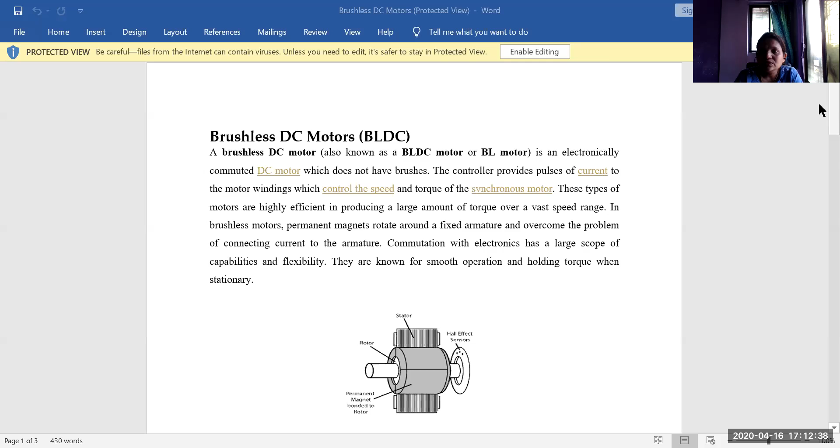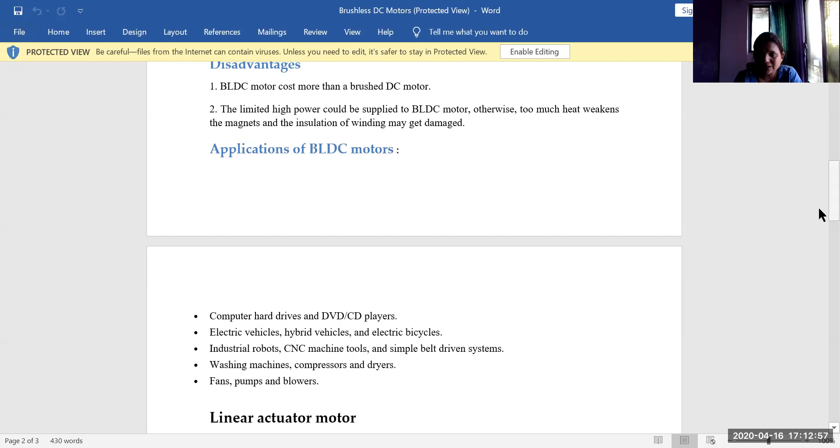So this type of motor is widely used in DVD and CD players as well as washing machines, compressors, dryers, fans, pumps, and blowers. So these are the applications. Now we will see the advantages. Advantages of brushless DC motors are that they can operate at high speed under any condition. There is no sparking and much less noise during operation. As we know, these are brushless; since the brushes are absent, the mechanical energy loss due to friction is less, which enhances efficiency. This type of motor accelerates and decelerates easily. They have low rotor inertia.

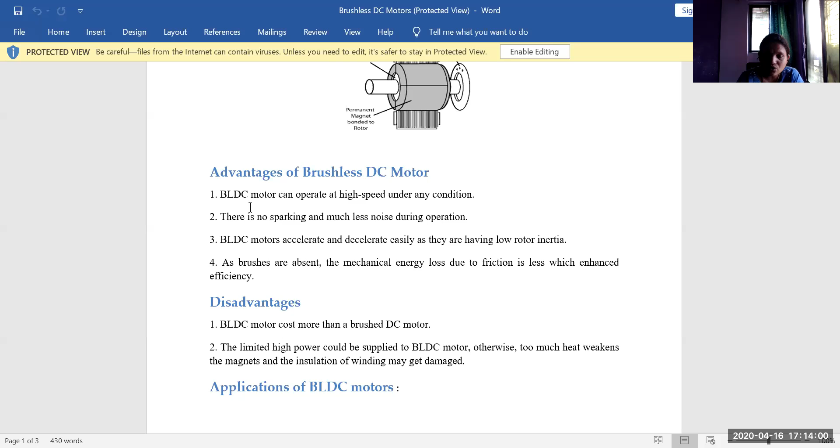This motor also has drawbacks: the BLDC motor cost is very high compared to the brushed DC motor. It requires limited high power supplied to this motor; otherwise, heat weakens the magnets and the insulation of the winding will get damaged. So these are the advantages and disadvantages. Applications I already told: they are used in CD players, electric vehicles, electric bicycles, and industrial robots. One of the main applications nowadays is CNC machine tools and simple belt driven systems. So this is the BLDC, that is, the brushless DC motor.

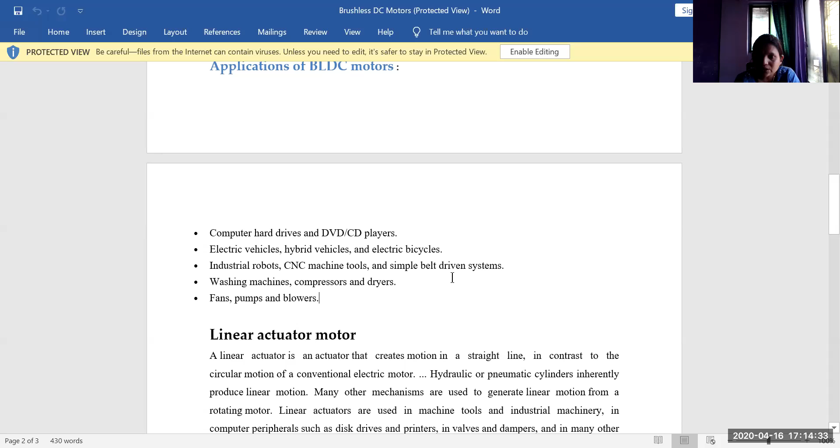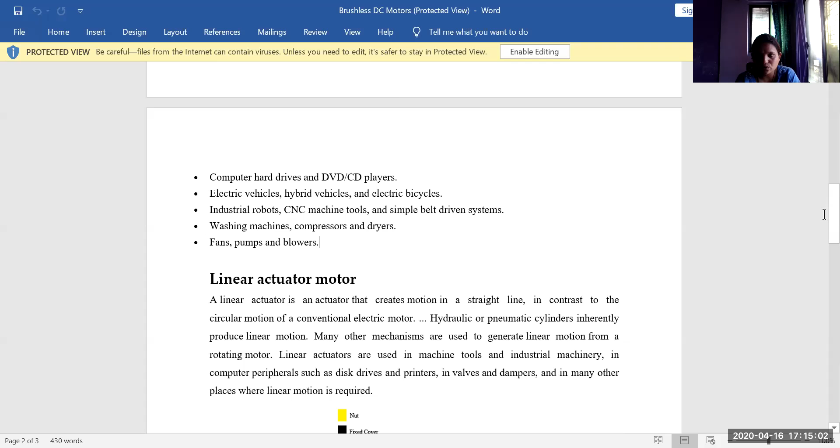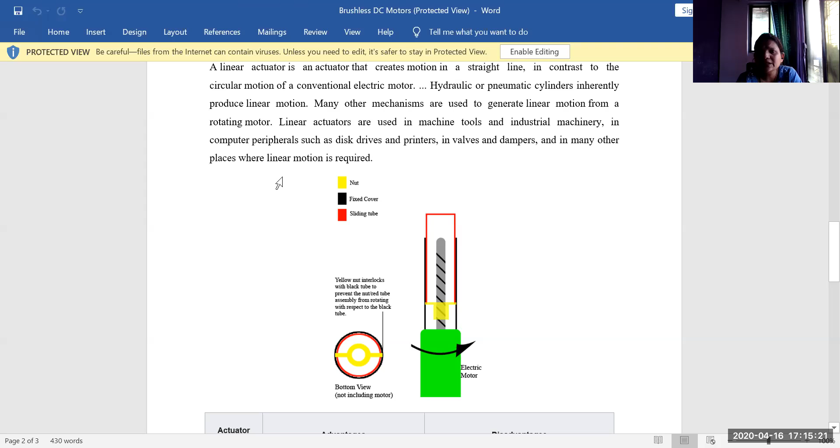Now another motor is the linear actuator. Here again the same question will appear in the exam, that is, write a short note on linear actuator motor. This type of motor creates motion in a straight line. There is no circular motion. It creates motion in a straight line in contrast to the circular motion of a conventional electric motor. So this is the arrangement of the linear actuator motor. This red one is the sliding tube, the black one is the fixed cover, and this one is the nut. So the inner part will be the linear actuator, creating the motion in a straight line.

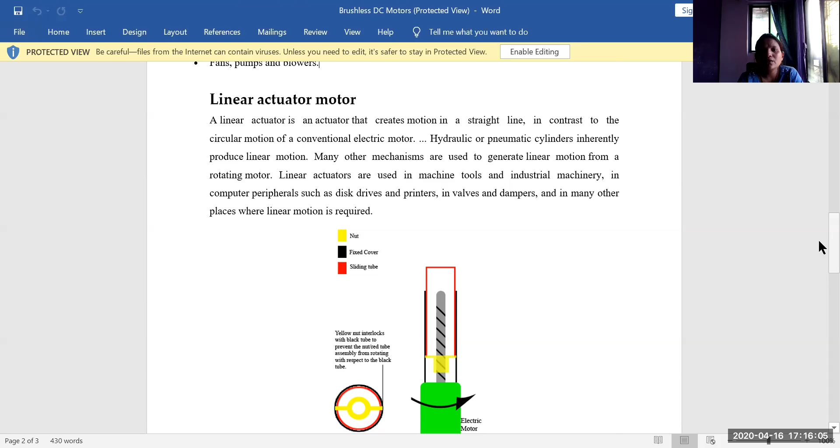These mechanisms are used to generate linear motion from a rotating motor. These are used in machine tools, industrial machinery, computer peripherals such as disk drives and printers, as well as in valves and dampers, and also in many other places where linear motion is required. This is similar to hydraulic cylinders, which inherently produce linear motion. So this is the linear actuator motor. We already discussed the applications. Now there are some advantages and disadvantages.

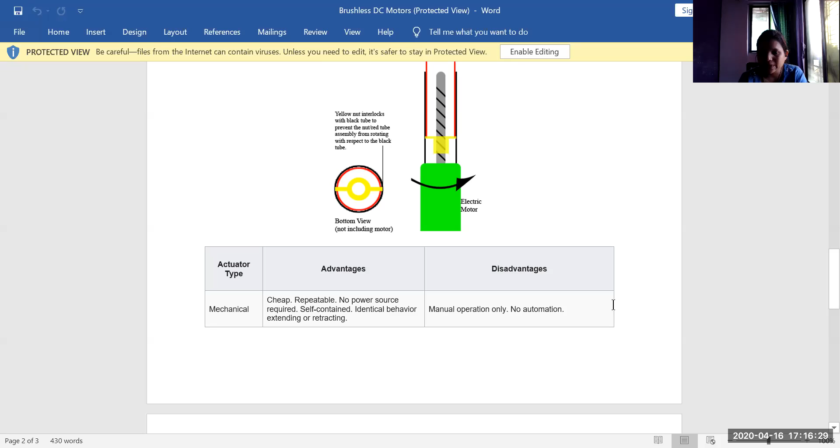For the actuator types, if it is mechanical, the advantage is that no power source is required. But the disadvantage is that it will be manual operation, not automatic, because no power source is used. If the actuator type is electromechanical, meaning electronics and mechanical mixed, the advantages are that it is very cheap and operation can be automated, but the disadvantage is many moving parts prone to wear. If the linear actuator is a linear motor, it will be a simple design, with minimum moving parts and high speed possible, but the disadvantage is low to medium force.

If it is the piezoelectric type, very small motions are possible at high speed and it consumes barely any power, but it has short travel unless amplified mechanically. These are the disadvantages. Another disadvantage is that this piezoelectric linear actuator motor requires 24 volts, and this type of motor is very expensive. So these are the disadvantages.

So in this lecture we studied two types of motors, that is, the BLDC brushless DC motor and the linear actuator motor. In the next lecture we will see the servo motor as well as the speed control of the DC shunt motor.